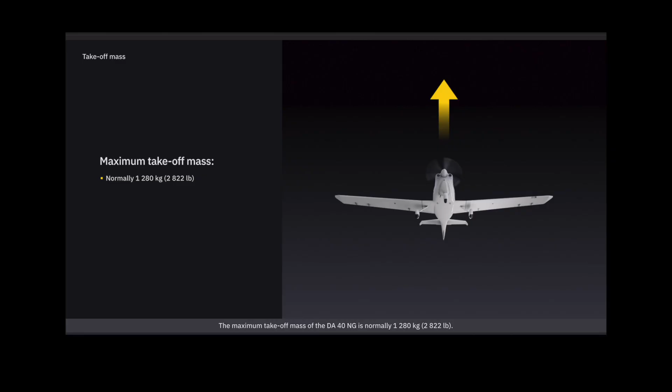Mass and center of gravity. The maximum takeoff mass of the DA-40NG is normally 1,280 kilograms. This can be increased to 1,310 kilograms if modification from mandatory design change advisory is installed.

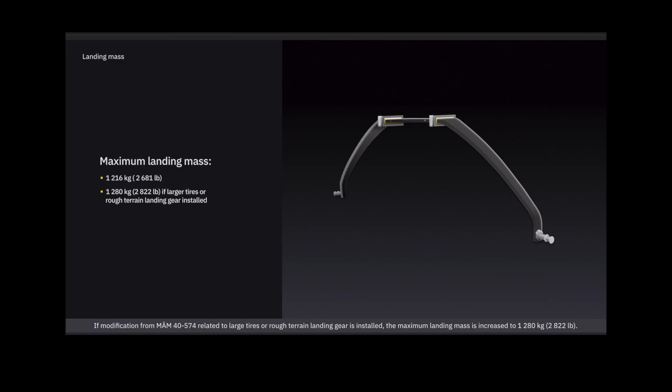The maximum landing mass of the airplane is normally 1,216 kilograms. If modification from mandatory design change advisory related to large tires or rough terrain landing gear is installed, the maximum landing mass is increased to 1,280 kilograms.

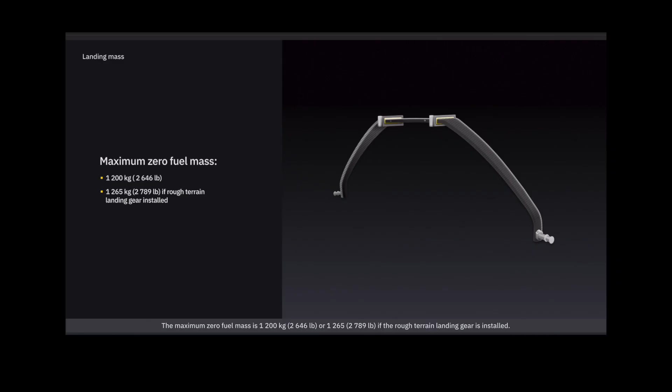The maximum zero fuel mass is 1,200 kilograms, or 1,265 kilograms if the rough terrain landing gear is installed. The maximum load allowed is normally 30 kilograms. If the extended baggage compartment is installed, the maximum load is 45 kilograms.

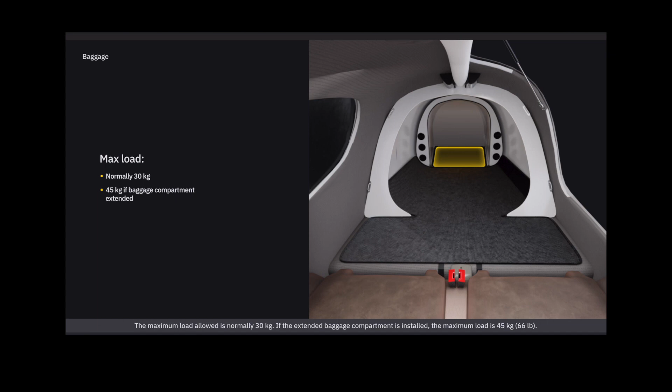Warning. Exceeding the mass limits will lead to an overstressing of the airplane, as well as to a degradation of the flight characteristics and flight performance.

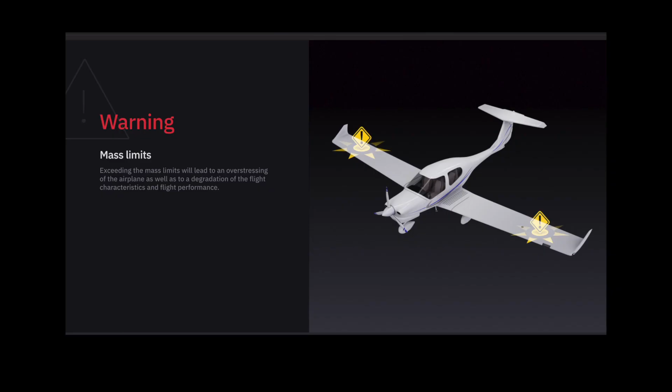Note. In some countries, the beginning of a flight is defined by starting the engine. In those countries, a maximum ramp mass of 4 kilograms above the maximum takeoff mass is approved. At the time of liftoff, the maximum permitted takeoff mass must not be exceeded.

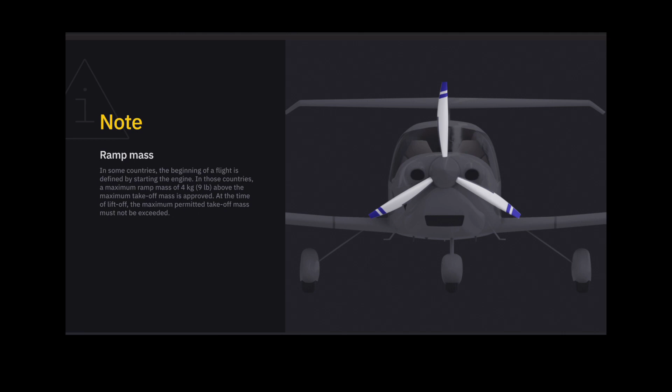Note. The maximum zero fuel mass is the highest mass with empty fuel tanks.

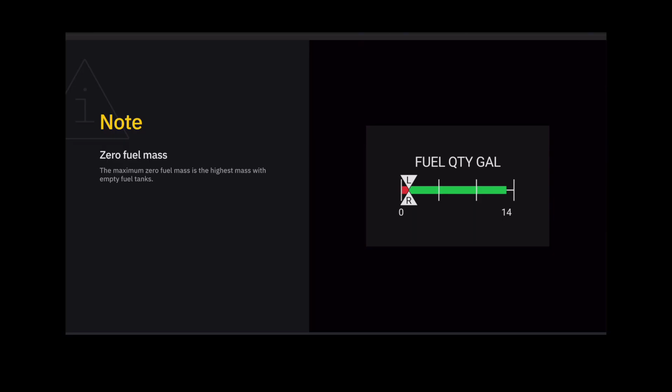The reference datum plane used for calculating the center of gravity is a plane that is normal to the longitudinal axis of the airplane. It is located in front of the airplane, and is vertical if the longitudinal axis is leveled. The plane is placed 2.194 meters in front of the most forward point of the root rib, on the stub wing.

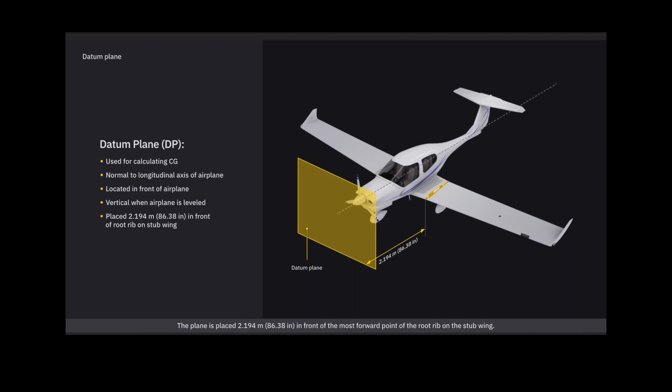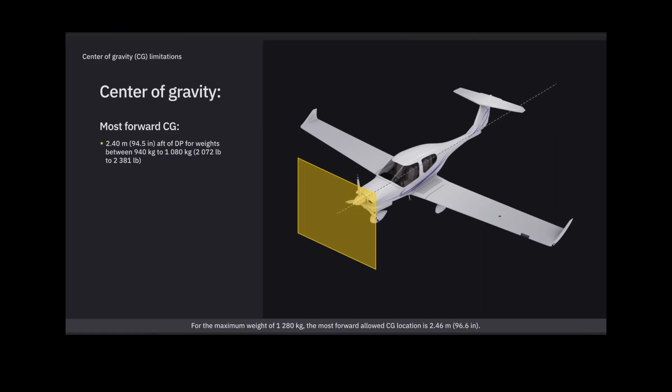For all flight conditions, the center of gravity limitations must be followed. The most forward allowed center of gravity location is 2.40 meters aft of the datum plane, for weights between 940 kilograms to 1,080 kilograms. For the maximum weight of 1,280 kilograms, the most forward allowed center of gravity location is 2.46 meters. If the maximum weight is increased to 1,310 kilograms, the most forward center of gravity is 2.469 meters. For weights between these values, a linear interpolation is used.

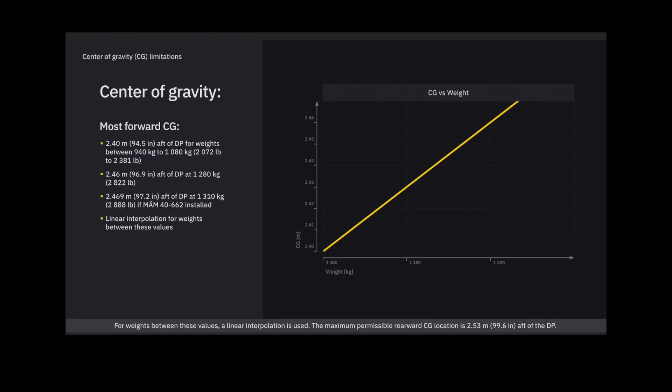The maximum permissible rearward center of gravity location is 2.53 meters aft of the datum plane.

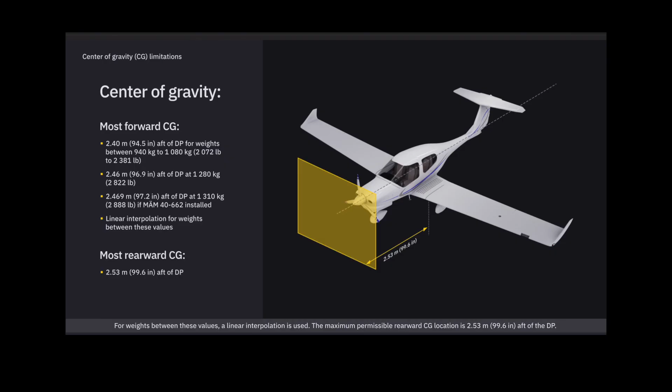Warning. Exceeding the center of gravity limitations reduces the controllability and stability of the airplane.

Airspeed limitations. The airplane operating maneuvering speed, VO, is as follows: 101 knots indicated airspeed for weights up to 1,080 kilograms. The VO is 108 knots indicated airspeed for weights between 1,080 kilograms and 1,180 kilograms. The VO is 113 knots indicated airspeed for weights above 1,180 kilograms.

Do not fully or abruptly activate any control surfaces above these speeds, as this could lead to excessive loads on the airplane.

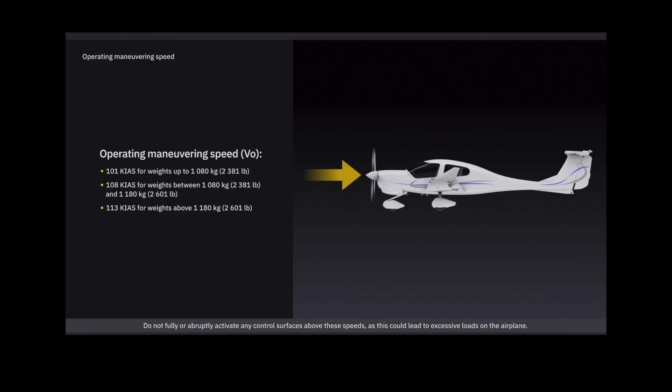The maximum structural cruising speed is equal to the design cruising speed, and has a value of 130 knots indicated airspeed. You may only exceed this speed in smooth air, and only with great caution.

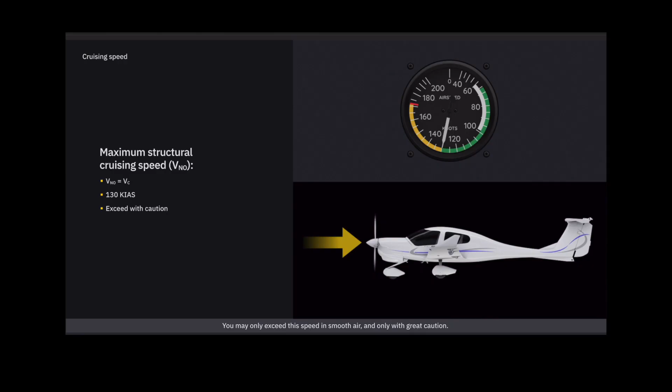The maximum flaps extended speed is 98 knots indicated airspeed for landing, and 110 knots indicated airspeed for takeoff. Never exceed these speeds for the relative flap settings.

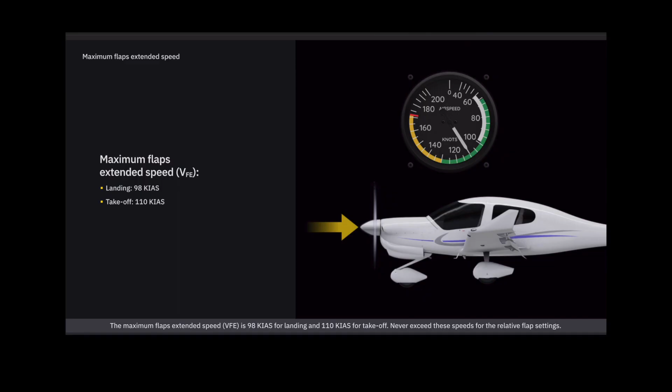The never exceed speed in smooth air is 178 knots indicated airspeed. You cannot exceed this speed in any condition.

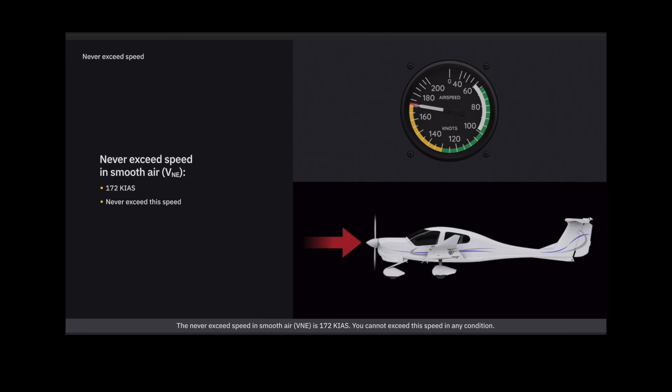Markings for specific airspeed ranges can be found in the airspeed indicator. The white arc represents the operating range with flaps fully extended. The speeds are between 60 knots indicated airspeed to 98 knots indicated airspeed.

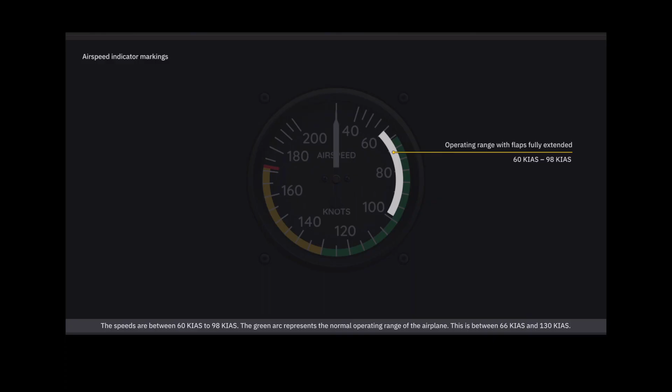The green arc represents the normal operating range of the airplane. This is between 66 knots indicated airspeed and 130 knots indicated airspeed.

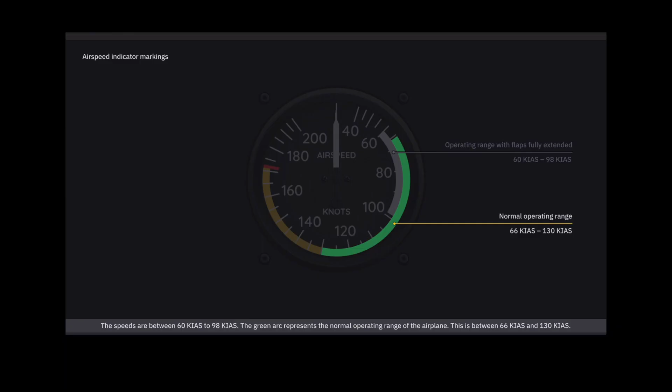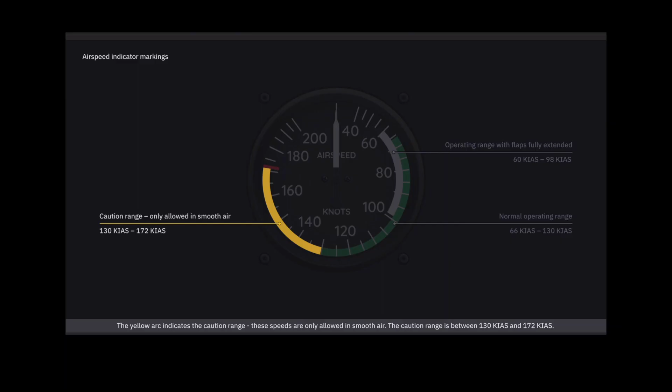The yellow arc indicates the caution range. These speeds are only allowed in smooth air. The caution range is between 130 knots indicated airspeed and 172 knots indicated airspeed. The red line at 172 knots indicated airspeed indicates the never exceed speed.

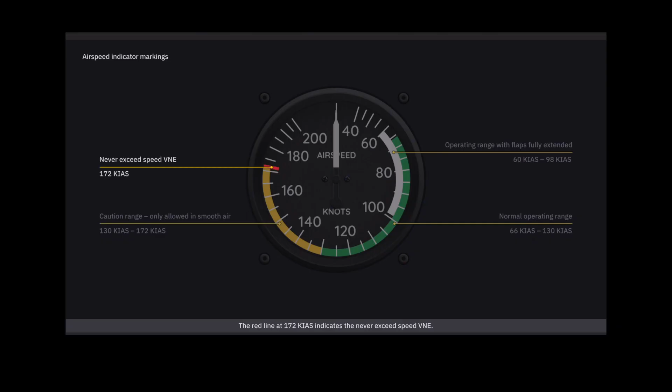Power plant limitations. The DA40NG has an Austro engine installed, the E4A model.

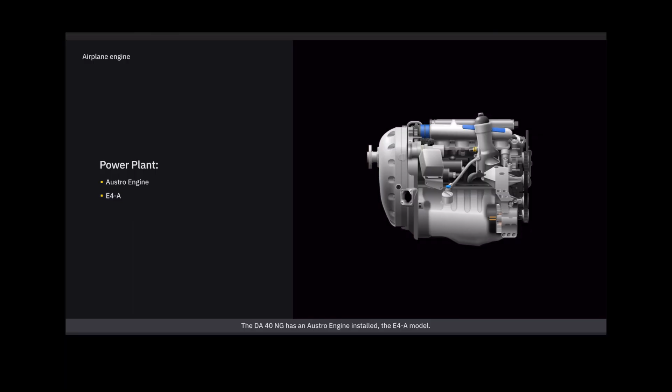The maximum engine takeoff power is 123.5 kilowatts at 2,300 RPM. The maximum continuous power is 114 kilowatts at 2,100 RPM.

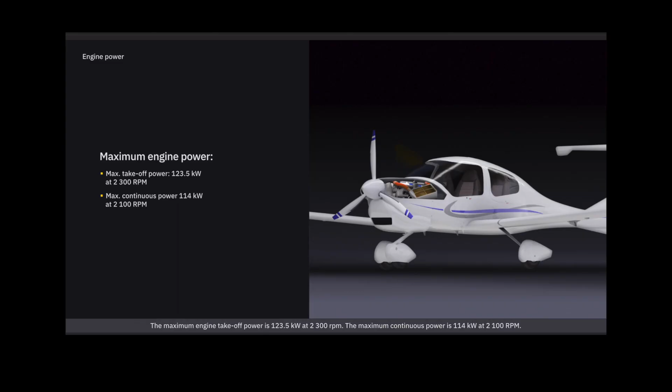The revolutions per minute limitations are given as maximum propeller RPM. For takeoff, the maximum propeller RPM is 2,300, and it can be kept for up to 5 minutes. The maximum continuous power RPM is 2,100 RPM. The maximum overspeed is 2,500 RPM, but it can be held only for up to 20 seconds.

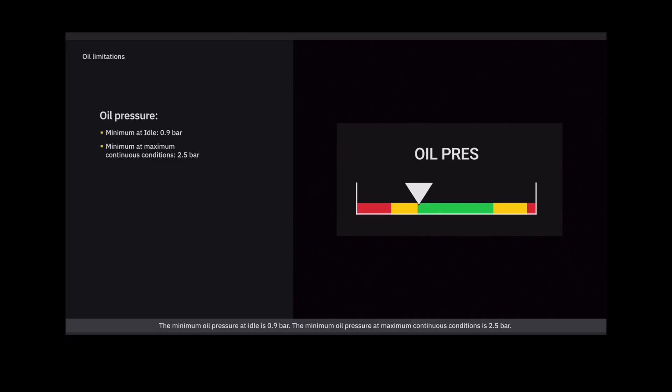The minimum oil pressure at idle is 0.9 bar. The minimum oil pressure at maximum continuous conditions is 2.5 bar. The normal oil pressure range is 2.5 bar to 6.0 bar. The maximum oil pressure is 6.5 bar.

The minimum oil temperature is minus 32 degrees Celsius. The normal oil temperature range is 50 degrees Celsius to 135 degrees Celsius. The maximum oil temperature is 140 degrees Celsius.

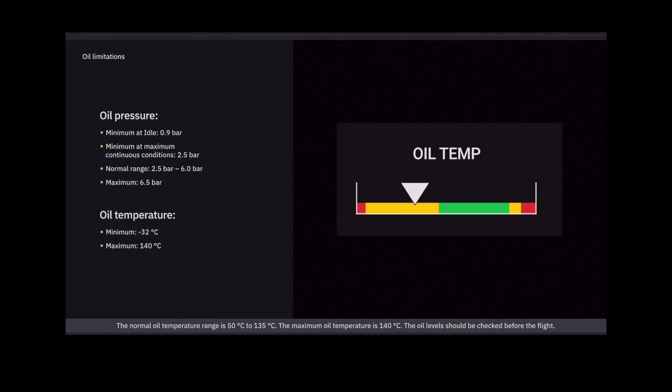The oil levels should be checked before the flight. The minimum oil quantity is 5.0 liters and the maximum is 7.0 liters. The maximum oil consumption is 0.1 liters per hour. The approved oil types are shown on the screen.

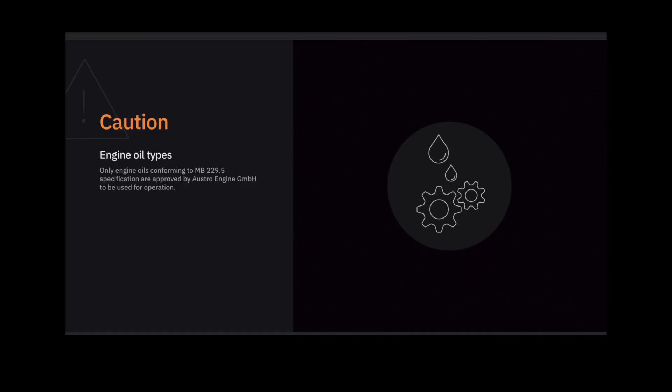Caution! Only engine oils conforming to MB 229.5 specification are approved by Austro Engine GmbH to be used for operation. Note: it is not recommended to mix different SAE grades.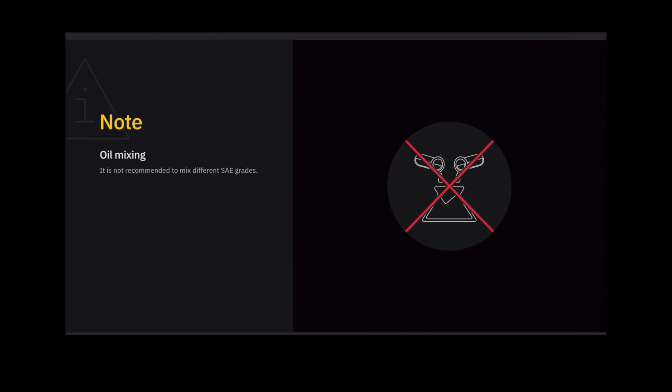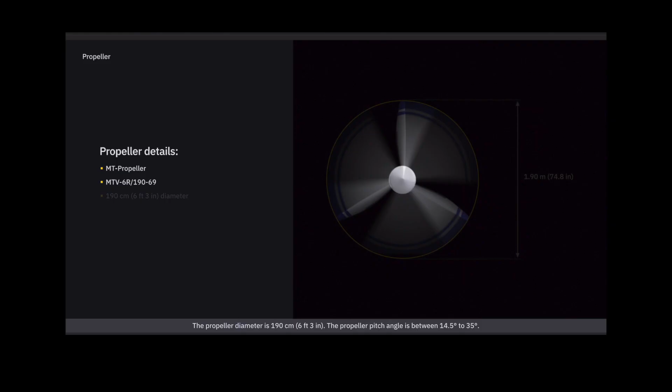The engine propeller is produced by MT Propeller, and the model used is MTV 6R 190/69. The propeller diameter is 190 centimeters. The propeller pitch angle is between 14.5 degrees to 35 degrees.

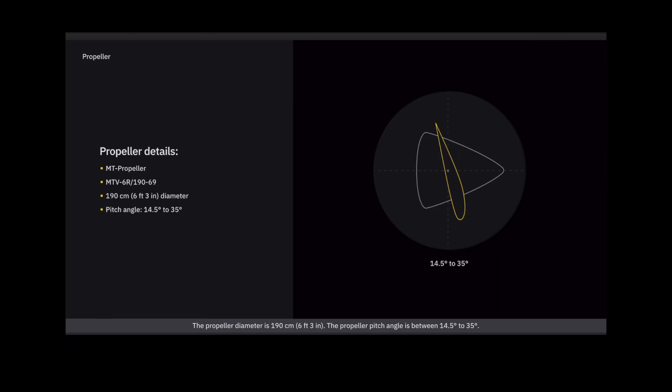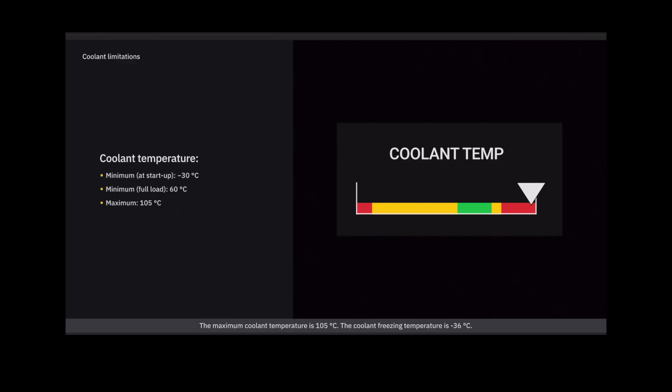The minimum coolant temperature is minus 30 degrees Celsius at engine startup. The minimum coolant temperature at full load is 60 degrees Celsius. The maximum coolant temperature is 105 degrees Celsius. The coolant freezing temperature is minus 36 degrees Celsius.

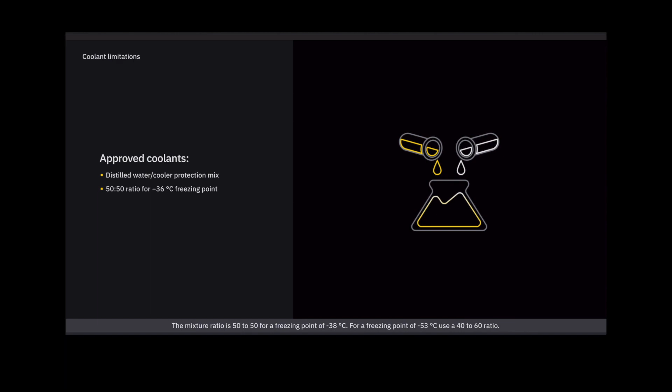The approved coolant is a mix of distilled water and cooler protection. The mixture ratio is 50:50 for a freezing point of minus 36 degrees Celsius. For a freezing point of minus 53 degrees Celsius, use a 40:60 ratio. Refer to the engine manufacturer's operation and maintenance manual for more details.

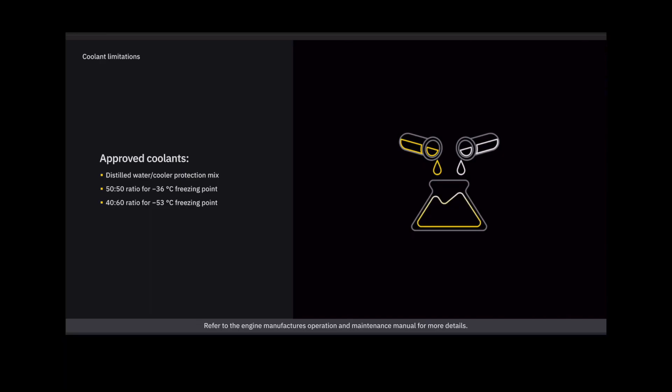The maximum restart altitude is 16,400 feet pressure altitude for immediate restarts, and 10,000 feet pressure altitude for restarts within 2 minutes.

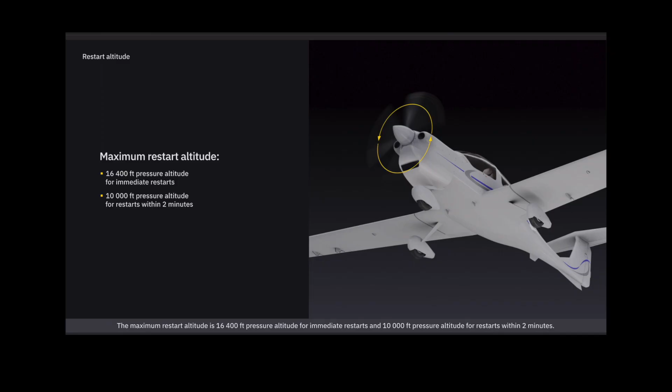Approved maneuvers. The airplane is certified in the normal category, according to JAR 23. The minimum number of crew is 1 person. When flying, the maximum number of occupants is 4 persons.

For the normal category, approved maneuvers are as follows. All normal flight maneuvers are allowed. Stalling is permitted apart from dynamic stalling, which is prohibited.

Lazy eights, chandelles, steep turns, and similar maneuvers are allowed, as long as the bank angle is not greater than 60 degrees. Caution! Aerobatics, spinning, and flight maneuvers with a bank angle of more than 60 degrees are not permitted in the normal category.

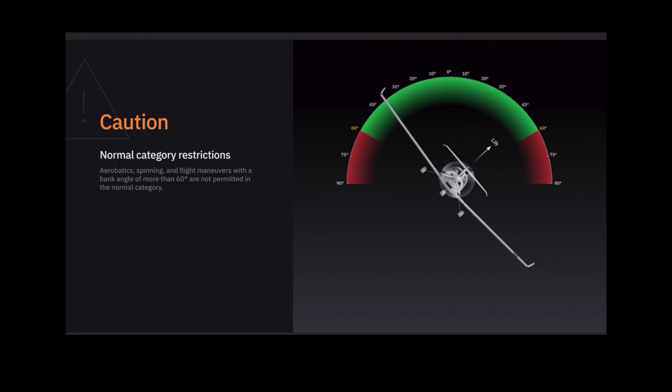Caution! Intentional negative G maneuvers are not permitted.

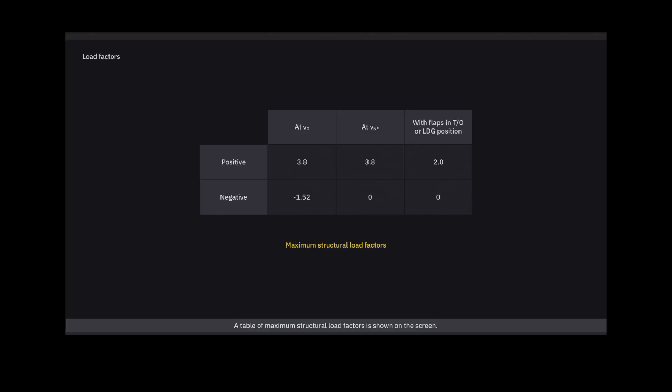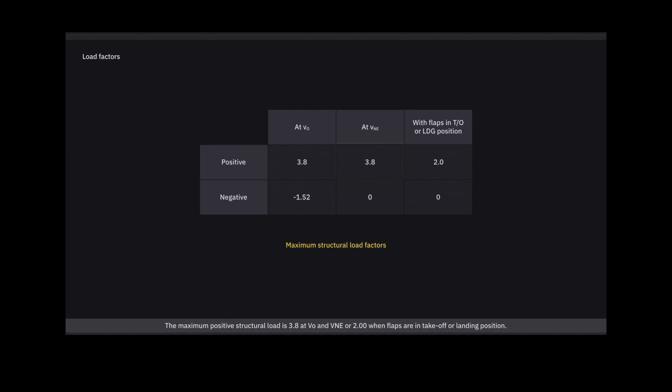A table of maximum structural load factors is shown on the screen. The maximum positive structural load is 3.8 at maneuvering speed, and never exceed speed, or 2.0 when flaps are in takeoff or landing position.

The maximum negative structural load is minus 1.52 at maneuvering speed, and 0 at never exceed speed, and with flaps in takeoff or landing position. Warning! Exceeding the maximum load factors will lead to an overstressing of the airplane.

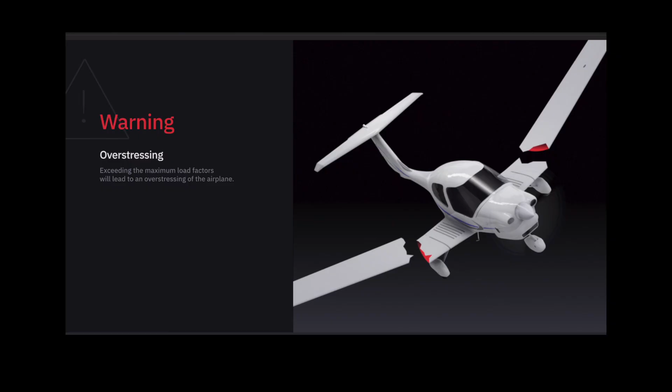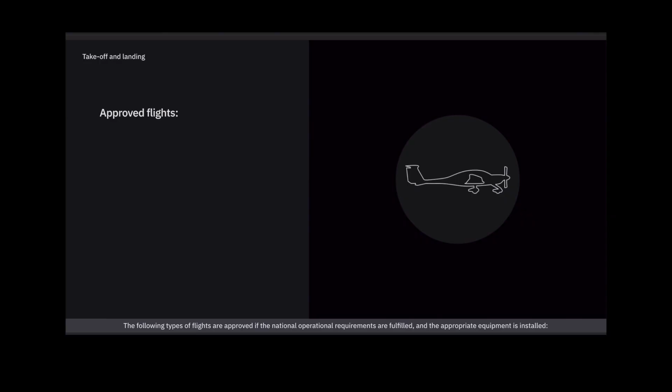Kinds of operation. The following types of flights are approved if the national operational requirements are fulfilled and the appropriate equipment is installed: daytime flights according to visual flight rules, flights according to night visual flight rules, and flights according to instrument flight rules.

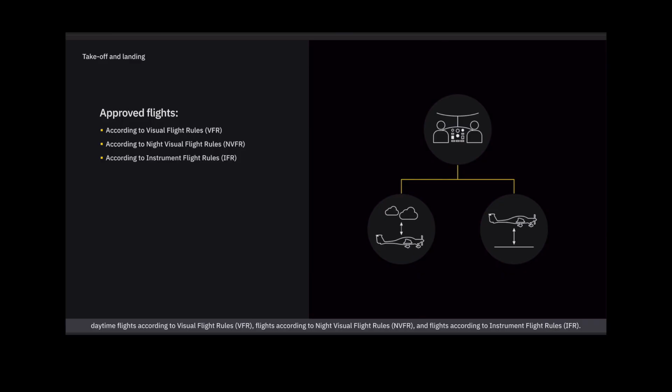Flights into icing conditions and thunderstorms are prohibited. IFR flights cannot be performed if the seal on the emergency switch is broken.

Takeoff and landing are permitted on paved surfaces and unpaved surfaces.

You can see the minimum operational, serviceable equipment required by JAR 23, and for operating purposes on the screen. Requirements are also dependent on the flight route, and national operating rules may introduce additional requirements. Click on the category to see the requirements for the appropriate flight types.

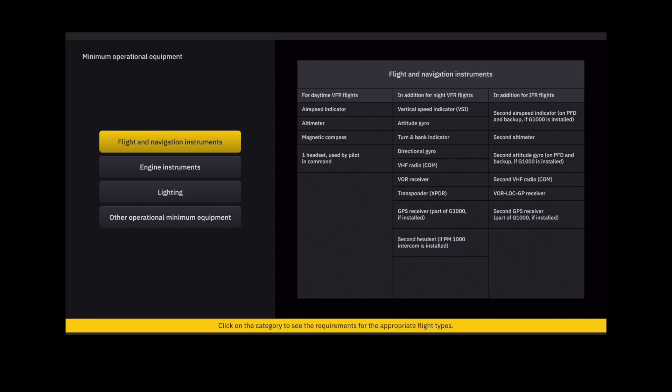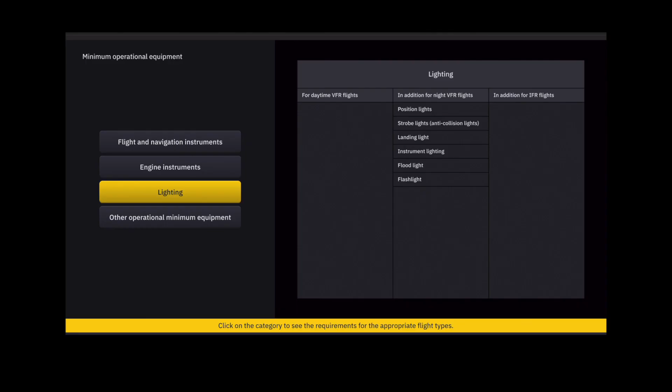Note: many of the items of minimum equipment listed in the table on the previous slides are integrated in the G1000 NXI, if installed.

Note: all engine systems and equipment must be functional prior to airplane takeoff. Any engine system or equipment failure must be corrected before the next flight.

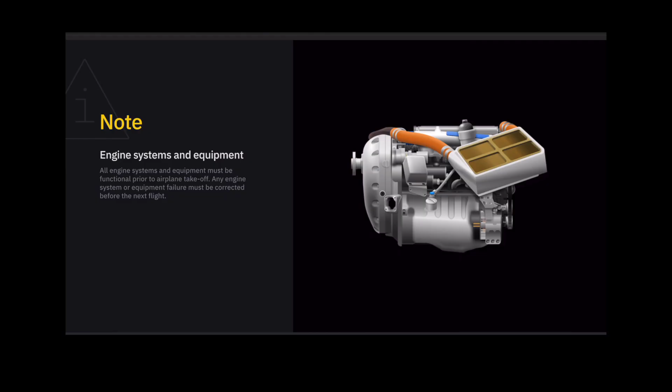Note: use only uncontaminated fuel from reliable sources. The following antimicrobial additives can be used.

Kathon FP 1.5, with a maximum concentration of 100 parts per million. And Biobor JF, with a maximum concentration of 270 parts per million for initial treatment, and 135 parts per million thereafter. Mixing fuel additives is forbidden.

Caution! In case of an unknown or an overdosage of the fuel additive, the fuel system must be purged until the dosage is within the permitted limits.

Note: the specified additives are qualified for operation with the certified fuel grades. To clean the fuel system of the airplane, a higher dosage of the specified additive is allowed, under consideration of the instructions of the additive supplier.

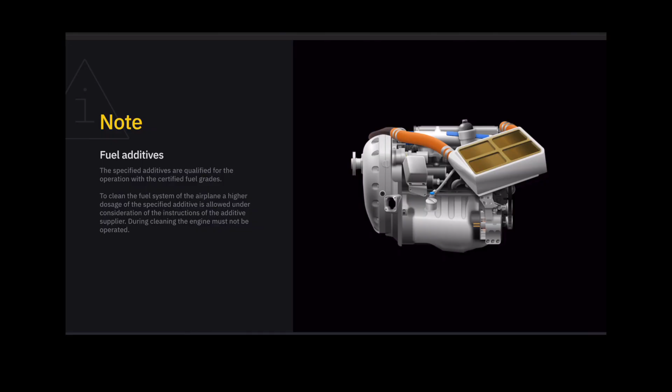During cleaning, the engine must not be operated. Note: the instructions of the fuel additive supplier must be followed.

Prist High Flash is the permitted anti-icing fuel additive. The maximum allowed concentration is 1,500 parts per million.

Caution! The use of PRIST high flash fuel additive is only permitted with Jet A, Jet A1, ASTM D1655, and JP8, F34.

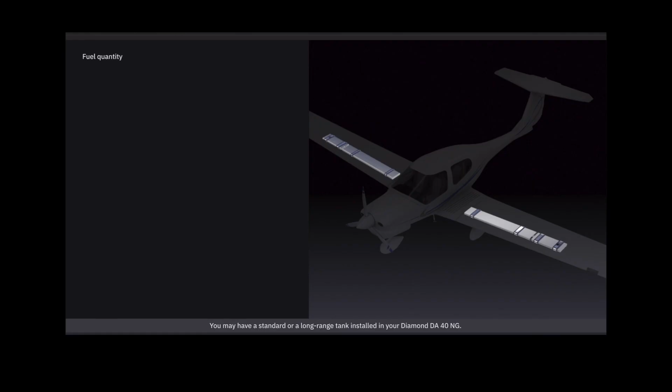You may have a standard or a long-range tank installed in your Diamond DA40NG. If you have a standard tank installed, the total quantity is 2 times 15 US gallons, 2 times 56.88 liters. The total amount of usable fuel is 2 times 14 US gallons, 2 times 53 liters.

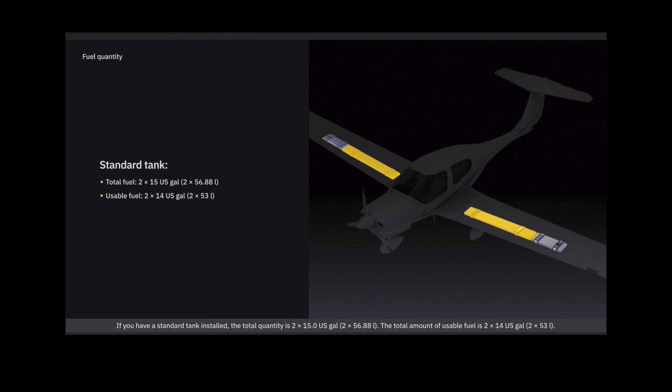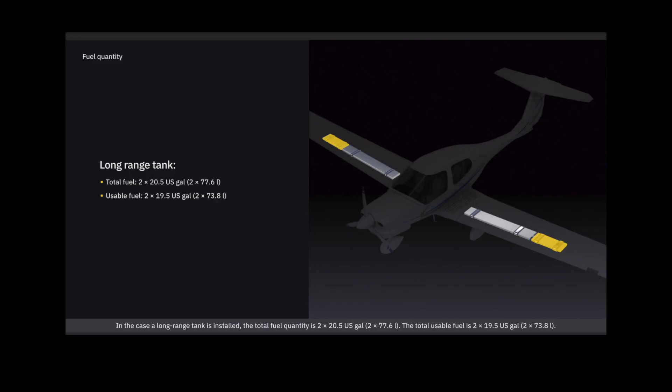In case a long-range tank is installed, the total fuel quantity is 2 times 20.5 US gallons, 2 times 77.6 liters. The total usable fuel is 2 times 19.5 US gallons, 2 times 73.8 liters.

The maximum indicated fuel quantity is 14 US gallons, 53 liters, per tank. The maximum permissible difference between the left and right tank is 9 US gallons, 34 liters.

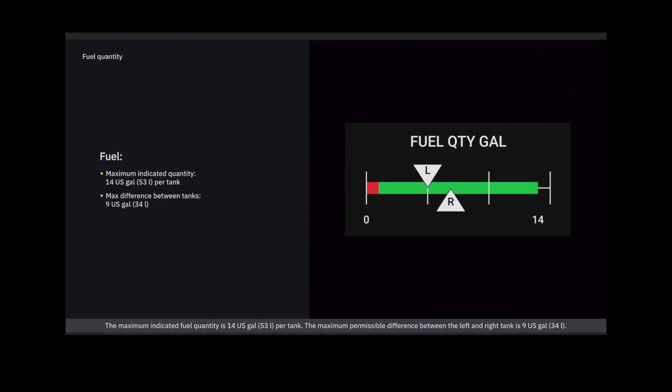Caution! If an indicator shows 14 US gallons, then 19.5 US gallons must be assumed for the calculation of the difference between right and left tank.

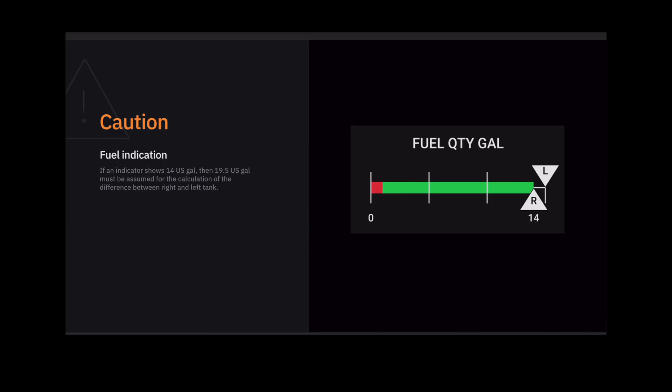Limitation placards. The operating maneuvering speed limitation placard can be found on the left of the instrument panel, below the engine switch.

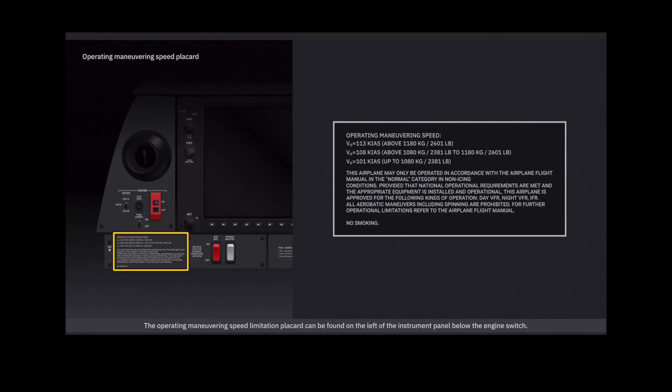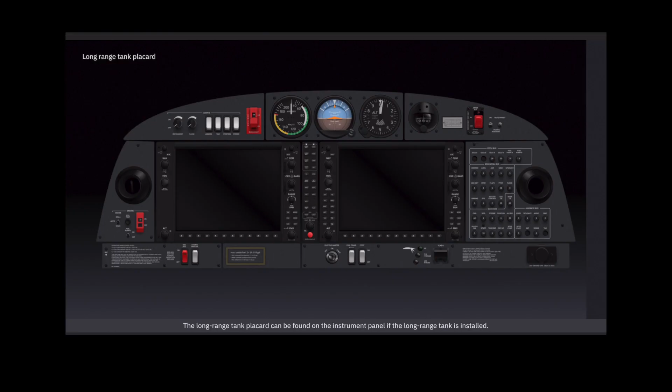The long-range tank placard can be found on the instrument panel, if the long-range tank is installed. The approved fuel warning placard can be found next to the 2 fuel filler necks.

The essential bus warning placard can be found on the left of the instrument panel, next to the essential bus switch.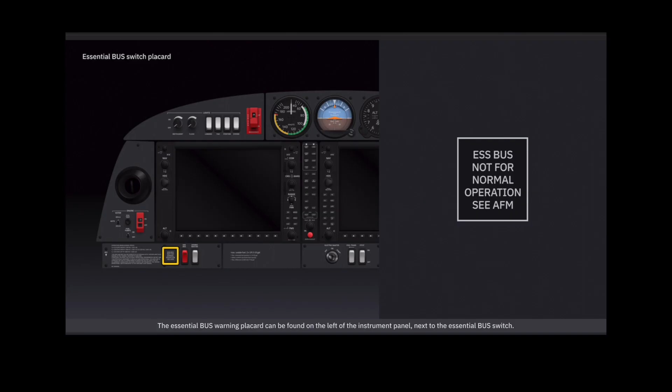The oil type placard can be found in the cowling, on the oil filler neck door. The emergency fuel valve placard can be found on the instrument panel on the emergency fuel valve.

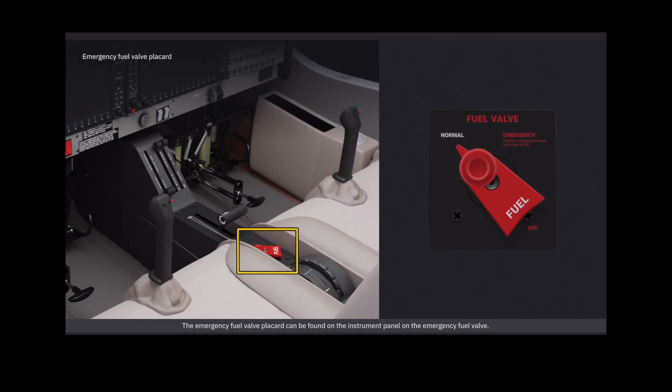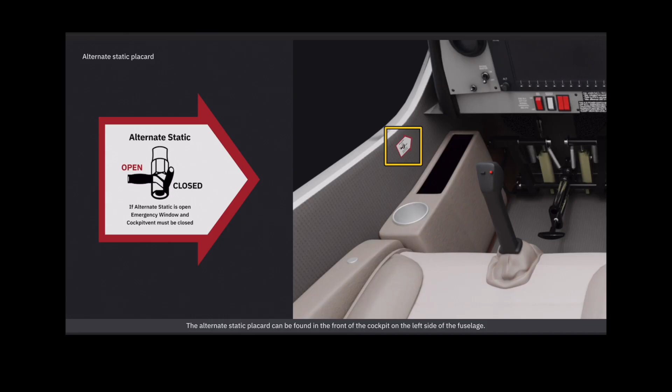The alternate static placard can be found in the front of the cockpit, on the left side of the fuselage. The baggage tray placard can be found in the baggage compartment.

The baggage extension placard can be found in the baggage compartment, if the extended baggage compartment is present. The baggage tube placard can be found in the baggage compartment, if the extended baggage compartment is present.

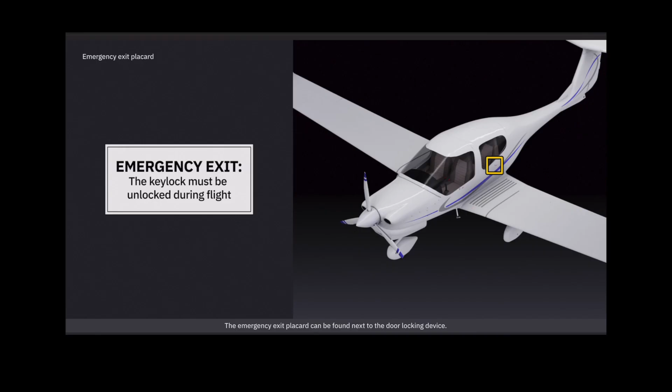The emergency exit placard can be found next to the door locking device. The no smoking placard can be found on the instrument panel.

Other limitations. The maximum operating altitude is 16,400 feet pressure altitude.

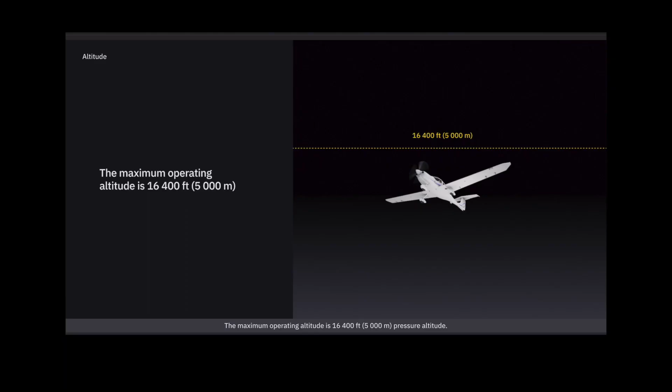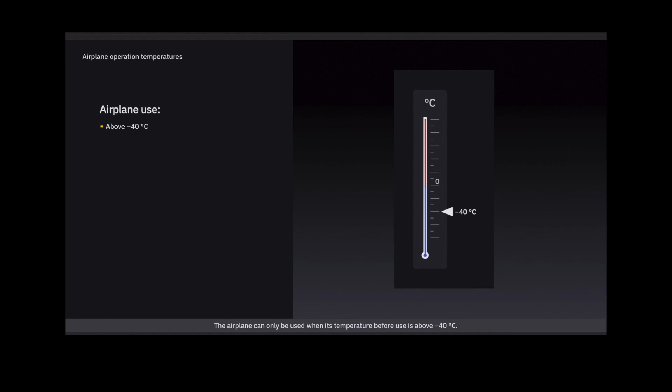The airplane can only be used when its temperature before use is above -40 degrees Celsius. Make sure to use an external preheater to heat the engine and pilot compartment before operation, if the airplane temperature is below -20 degrees Celsius.

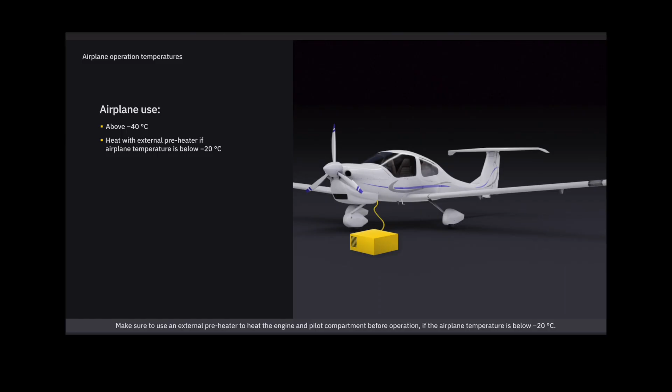Operation of the airplane is only allowed at temperatures below 20 degrees Celsius, if the fuel cooler inlet baffle is installed. Use of the fuel cooler inlet baffle is only allowed at these temperatures.

The coolant radiator inlet baffle must be installed if the outside temperature at takeoff is less than -30 degrees Celsius. It cannot be installed, however, if the temperature is above 0 degrees Celsius.

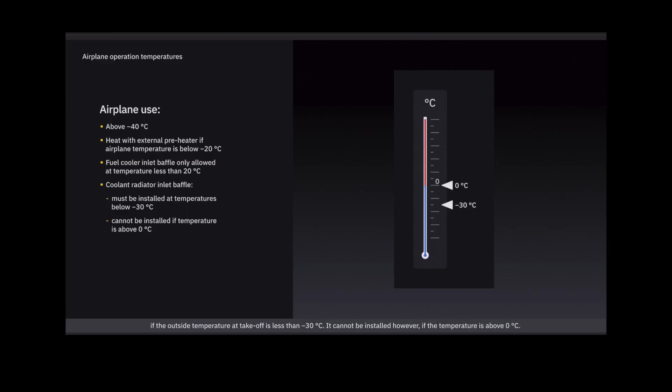The airplane batteries must be preheated if the airplane has been exposed to temperatures below -30 degrees Celsius for an extended period of time.

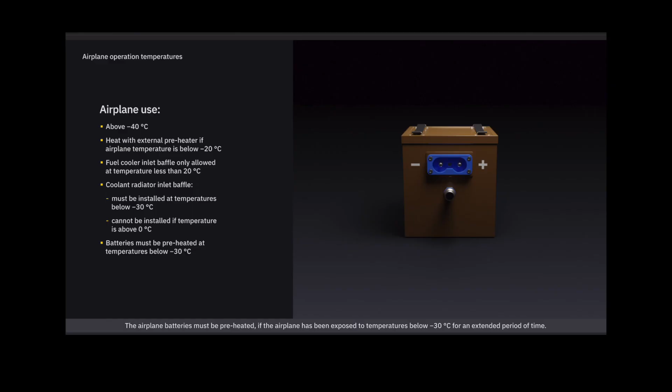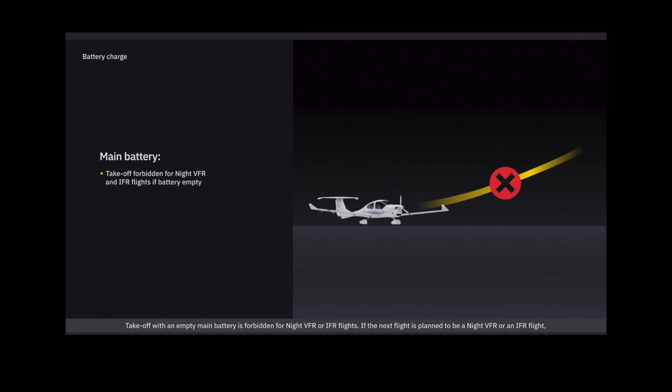Takeoff with an empty main battery is forbidden for night VFR or IFR flights. If the next flight is planned to be a night VFR or an IFR flight, the use of an external power supply to start the engine is forbidden. In these cases, the main battery must be charged before flight.

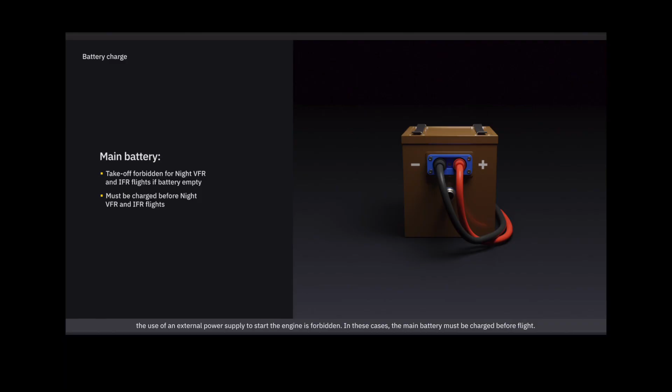Do not lock the canopy and passenger door during airplane operation.

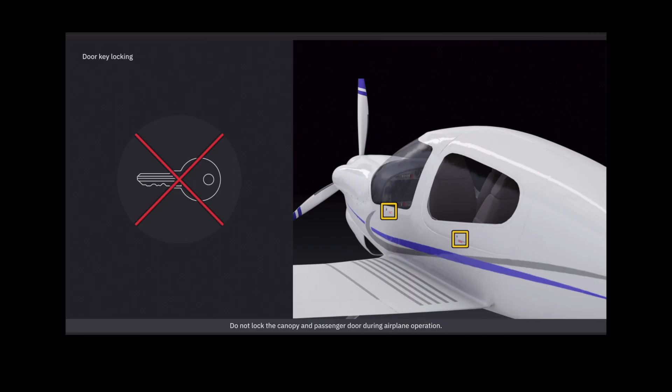The use of electronic equipment could lead to interference with the airplane's avionics. Therefore, do not use or switch on any electrical equipment that is not part of the airplane equipment.

Examples of prohibited items are as follows: mobile phones, remote radio controls, CRT screens, mini disc in record mode, laptops, including laptops with CD-ROM drives. CD and mini disc players in replay mode, cassette players, and video cameras are allowed. All equipment should be turned off for takeoff and landing.

The use of portable electronic devices during low visibility approaches is also prohibited.

Sun visors are only allowed to be used when cruising. Make sure to lock the visors in a fully upward position for all other flight phases.

Summary. With this section, you got familiar with mass and center of gravity, airspeed limitations, power plant limitations, approved maneuvers, kinds of operation, fuel, limitation placards, and other limitations.